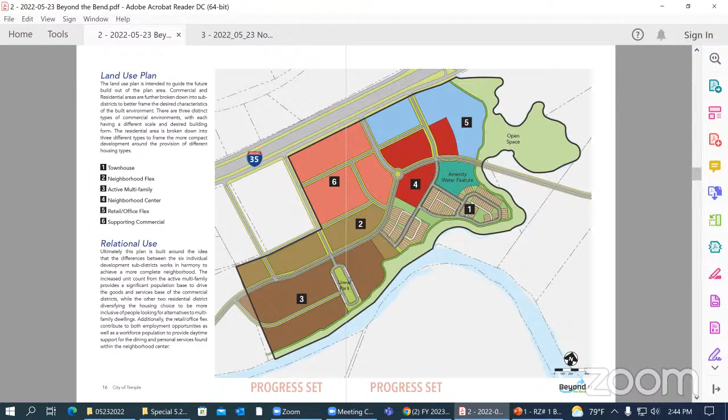And then lastly, open space, specifically a request from the developer. If you go back 2 slides, that chunk labeled open space in the north, it is kind of inaccessible to begin with anyways. So if you were to think about developing it, it's that much harder to get roads, that much harder to get utilities there. So identifying it right now as something that may be preserved as generic open space saves everybody a little bit in the long run as far as its ability to be maintained.

We've identified some typical development standards in here. We get that smaller lot, single family type, and then you get to that neighborhood flex, maybe it looks like a bigger lot.

So 100 feet in width in some instances by maybe a depth of 100, supported by an alley. But when you look at it, it almost is like a mansion-type house with multiple units in it. It's a different type of housing complex, more familiar from the 30s, 40s, 50s, and we're kind of trying to reinvigorate that.

Our active multifamily has real short setbacks, getting up to 4 stories. If they wanted to put in a garage behind it, you could do 5 stories, but that's what it's going to take to get there. Otherwise, you're not going to hit your target units per acre, and it wouldn't be worth it. We want to give them the option, though we've heard the market's probably not there in this area right now.

But if we can move the building a little bit closer, we can get more build-out on that area and get those higher units that can support some of that neighborhood commercial. Also, it's in a great location adjacent to the river and the open space and the parks.

As part of that, we know there's going to be some flexibility, so we want to make sure we're thinking about that within the initial planning process, identifying things like compatibility standards—where if you take something more residential in nature and put it next to something active with a lot more daily use, like a retail store, you can have a little bit of a buffer between the two, sometimes with fencing as screening, but definitely landscaping to help soften that edge.

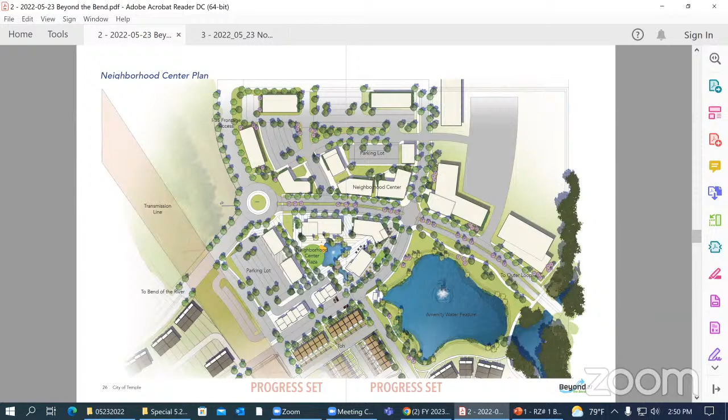And we do think there's some inward focused development to this as well. Some of that activity area for some sort of large green with some sort of water feature connected with that as well, as you can see, with all the development that surrounds it. We have townhomes and those flexible multifamily type units that are able to interface with this, and you can start seeing how they all interact and react and really harmonize around this one central point.

A lot of this starts with streets. We understand that in order to make this happen, you start to provide that guidance for how you get around the site, starting with our community collector.

The current major thoroughfare plan does not identify a community collector in this area, but if you're to add this much residential plus all the development going on in the future, or just even general access to the future site, you're going to need more than just the frontage road to convey people to and from the area. So we're really highlighting the need for that community collector to tie back to the south as well as to the north and eventually to the future outer loop, to get that second point of ingress into the site. And then we go down from there to our neighborhood collectors.

There's currently 2 that help feed into the southwestern side of the plan area where a lot of the residential is. Our linear Park Street is kind of an extension of that neighborhood collector. It's intended to really interact with the park, provide a lot of on-street parking, and help solve some of that multifamily guest parking, second or third car conundrum.

When you start to get into some of those 2-bedroom houses, we typically associate 2 cars for a 2-bedroom multifamily unit. But even with a 1-bedroom, sometimes it's still 2 cars. So you need to start to account for how we do this guest parking, second cars, and that on-street parking has to be accommodated somewhere. We've got to lay the groundwork for it with this kind of street plan.

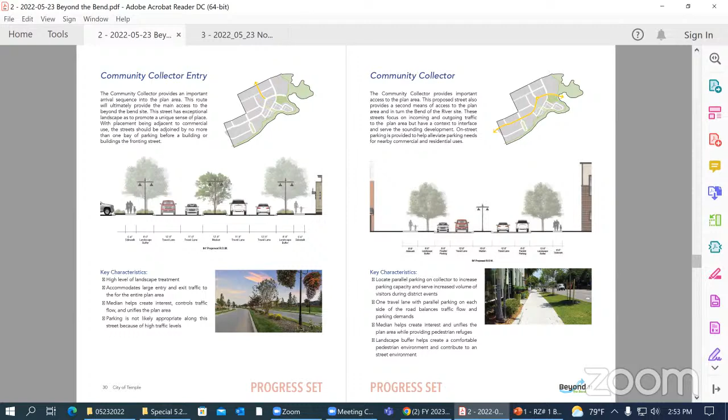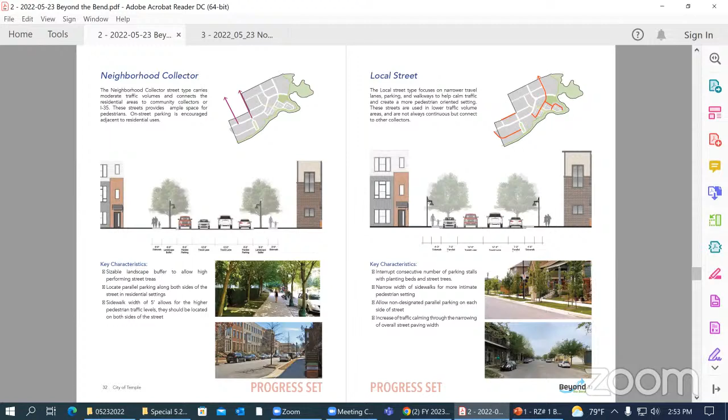We're proposing a side path on the south side of the road that helps tie in some multimodal opportunity for this key corridor. Again, we see that redundant but important approach of on-street parking, and then landscaping to buffer that edge with the development.

And we see that both on our neighborhood collector and our local streets. If we go to the last two, we have alleys, and we want to provide some direction there. We like the concept of, for alleys, the least amount of paving possible. Make sure you've got a good width, but you don't have to pave it all. So maybe 15 feet would be an appropriate width for the alley paving. But if it's a fire lane, sometimes you need to pave to that residential minimum standard of 20 feet we've seen in other places.

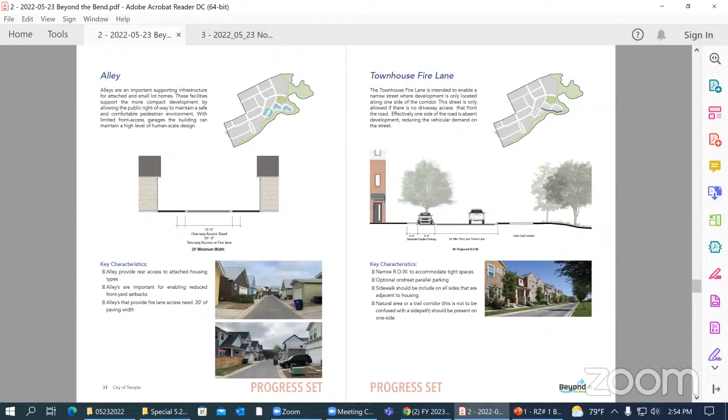And then we have the other one. There's some instances where there might be a need for what would effectively be a local road, but you're right adjacent to the riparian zone. So we said, maybe we can be a little more flexible, narrow the right of way, and really just think about the one side, because you already have a side path on the other side. So it's basically a half-street concept.

For our connector drive, we identified these as guidance to the commercial development in this area. It's basically a drive aisle with some expanded considerations for pedestrian and landscaping. We did this to encourage a walkable environment within that commercial office development. To do that, you need to break up these bigger blocks with access points. You don't need a full 50 or 54-foot right of way — you just need something that gives you a little landscape buffer, a sidewalk, and then a 24-foot drive aisle.

We don't need to beat a dead horse, but to really get that walkable space, you have to think about blocks. The bigger the block, the less walkable it is. But there's still that minimum return to consider — you still need to be practical. So we've provided some direction for how to think about blocks during the subdivision process.

And then, how do we think about not always meeting these block requirements with streets? Sometimes things like greenways — 34-foot strips of open space with a nice walk down the middle — serve that same role as a street from the pedestrian perspective. This allows you to maybe double what would be a regular block length, because you're removing the street and putting in this nice pedestrian connection instead.

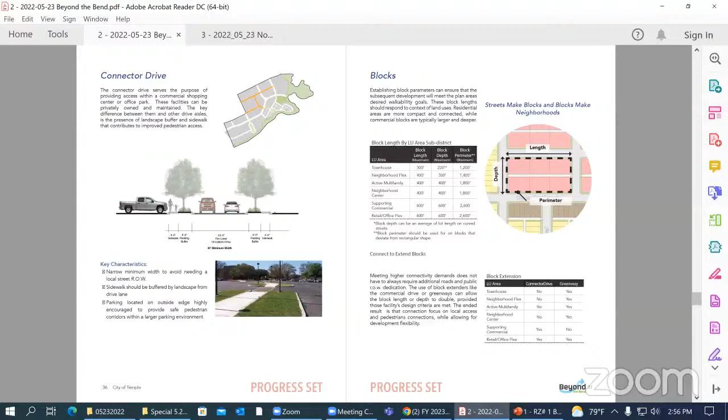So we think about trails and open space. A lot of times you think about side paths and such, but we really want to pull people from their developments into some of this open space as well. We're thinking about the overall shared use path along that main collector, but also how we pull people from those points into the open space and the overall trailway.

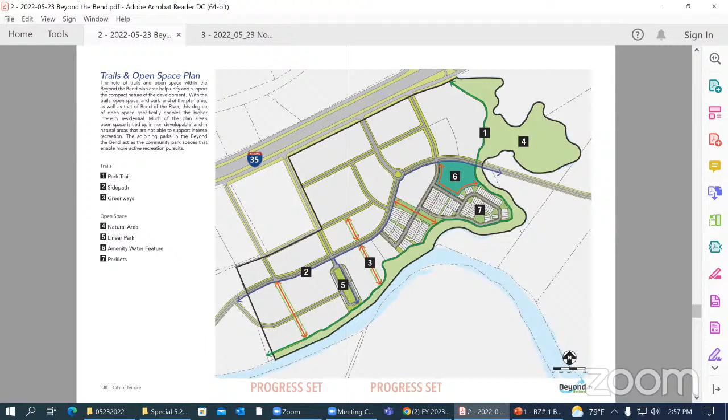These are the breakdown and delineation of the different open space and trail type elements. You can see here we have a couple different sections of those trails. The park trail has a 20-foot minimum right of way for that area — that may be the area that's maintained. You may have a mow strip on both sides of the trail, maybe even plant a tree on the development side to give some shade. We know there'll be a lot of shade along the river, but there's opportunity for shade on the other side as well.

We're looking at a 10-foot minimum, 12-foot max — we love a 12-foot wide trail for this, since we have people biking.

Maybe people are able to commute to work on this. The office is up in the northern part of the plan.

Our side path along the main collector, we're minimizing that width from what we normally would do as a 10-foot, because not too far away we have this large shared use park trail. We can minimize this to just an 8-foot wide paving area.

We do want that building interface to feel like it's coming and connecting with that as much as possible. Our typical sidewalks along streets and in greenways, and then our greenway itself, these are just wide strips basically breaking up that block, as Josh was mentioning, thinking about the walkability of all of this development is key. We can do greenways in two different ways: sidewalks on both sides of that greenway, or a sidewalk down the middle with connectors to that from the developments.

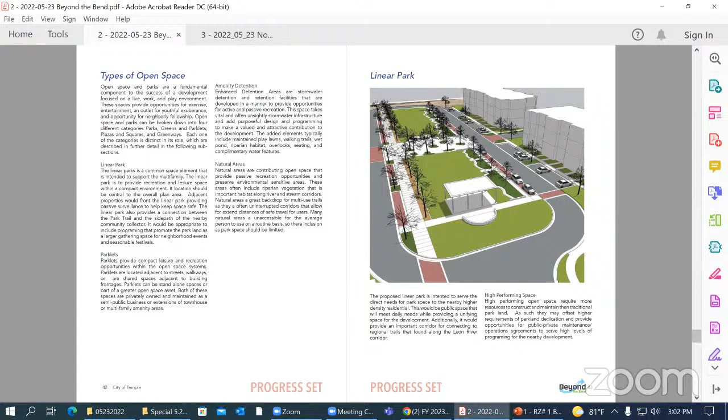That's the antithesis of the domain. The domain is missing park space and open space—I've heard numerous people say, oh, I'd love to live there, but... And you look at the little small parklets they have, they're overrun with people. Totally.

As part of this, we know that if we want this to be a complete neighborhood, we started to talk about the branding for it, the imagery. As part of that, we took in some direction from our developer and the site, and we pulled together this concept of beyond the bend. We've already talked about it that way, but it's really based off the site. Again, there's the bend of the river, what's next to it or what's beyond it. Well, that's where that comes from.

Our color theming really pulls in the need or the adjacency to the river, as well as, you know, we like this little hint of green because a lot of this was based off of the developer's desire to do some conservation practices out here.

And we see that branding kind of transforming into the wayfinding elements that help unify and get people around the site. We know that if you are going to have this level of intensity, you need to have that pedestrian scale wayfinding. People are going to visit, hopefully via bicycle as well as vehicles, so we want to make sure we're engaging both realms.

And then lastly, we just have some generic suggestions for signage. We know we want the signage to be a little bit more uniform across the development. Sometimes you get out there and the first five developments come in with great signage, all about the right scale, and then that last guy comes in and blows it out and screws up everything. So we think it's important to start thinking about signage as an element of the development. And this all ties back to that overall scale design we're really going for.

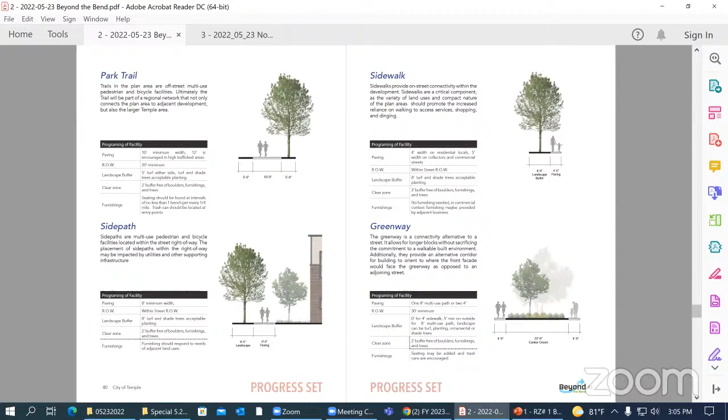Yes, just a second. Okay, one community collector going north. Out into the ether. What is that? Where does that go exactly? So it'll eventually tie into the outer loop.

And so as part of that, the goal is, hey, we don't always have to rely on the frontage road to get back into Temple. We're not saying that's built overnight, but it's a lot easier to get the right of way early on and plan for it than it is to wait. But if you think about all of this development, anything that happens into the river, you only have this collector coming out to 35 in two different spots. It's bisected from the rest of Temple.

Right, and so to get here, you'd have to come all the way around, through Belton and loop back around. I understand completely, it's very important to have that. So I still am having a hard time. So where...

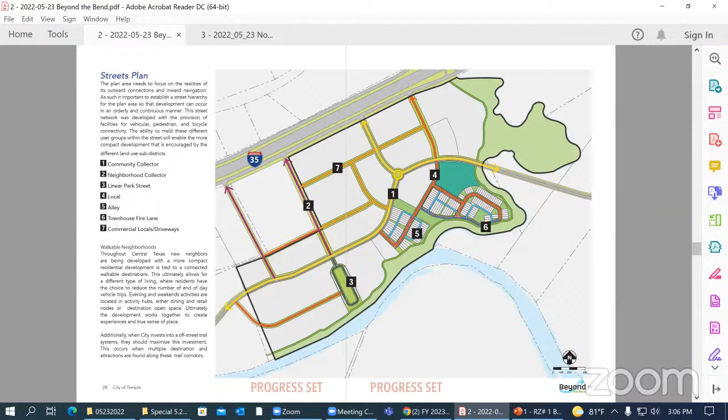Where along the outer loop does it join? It would just come in prior to that junction right there. Okay, I can sort of visualize it.

So, not very far away. No, I understand, neighborhoods right there. And right now it is undeveloped.

The future land use plan identifies that as more residential neighborhood. So again, tying back in allows better access between the future residential up here and the activity area. I really like the trails, the sidewalks, and also the parking.

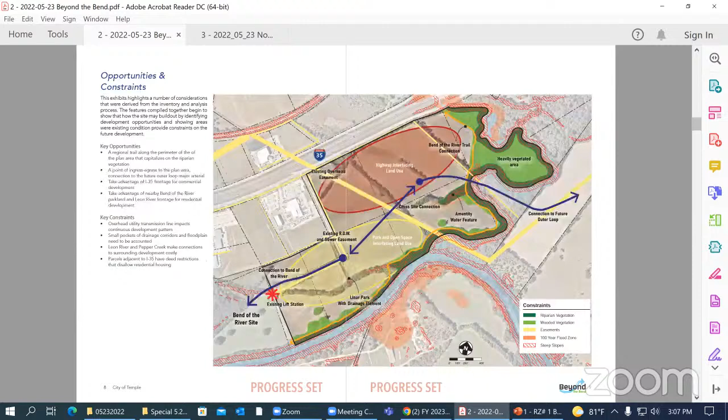Because you see a cluster of cars and you don't even see the houses, they need to be hidden somewhere, tucked away, so it can actually feel like a neighborhood. Especially at this smaller scale. With bigger housing and bigger lots, it's not as big of an issue, but when we're getting this compact, it definitely matters.

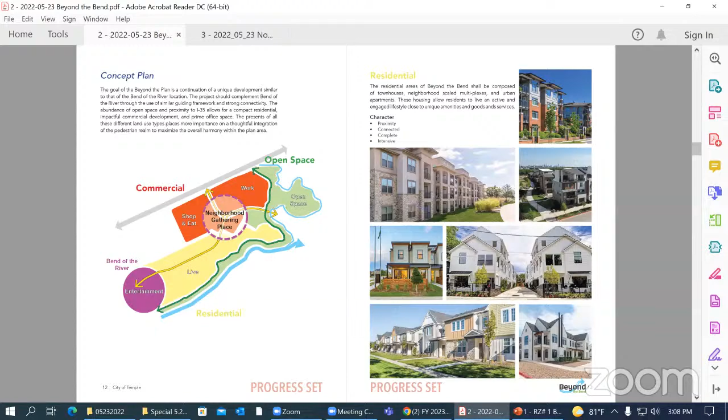How many total residents? 1,533 is our anticipated number. I thought I heard 1,500.

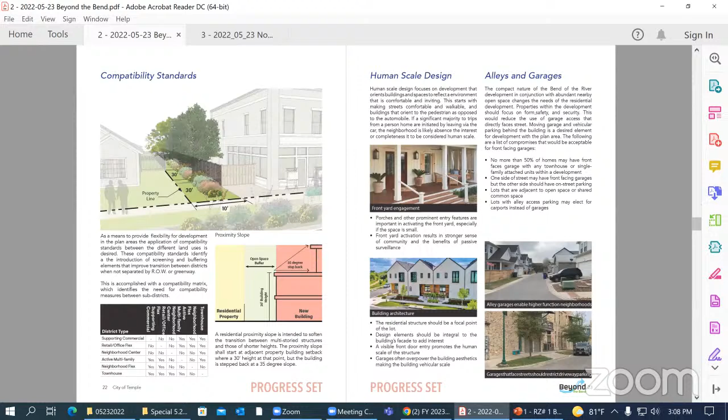We based the unit count on what the developer told us in conversations, what they were anticipating, along with some future thoughts of how he saw that area developing.

One thing I have to say is when we were told that someone was purchasing a large amount of land right next to the city's own property, we thought this was a great opportunity for us to work together on a master plan.

It really has been great working with this prospective developer. It's helped us along with the plan, and it's encouraging that this is also what they see happening here. Yes, we worked with them the entire way. They may not have seen this latest version, but I think they saw the 90% version.

Which is pretty much what we had last time, we just increased some of our sketches. That's what it was, the sketches.

Just like the sketches of the buildings, they saw the overall design concept in there. And of course we've been working heavily with Brian Chandler of Planning and Development Services, as well as Kevin Beavers with Parks and Recreation for the trail perspective.

This is an exciting opportunity for the trail. How many acres is that, roughly, for the whole development? I had it on that page... 50-something, it's 35 and 50 and 40, so just about 130, in the bend, beyond the bend of the river portion. Yes, ma'am.

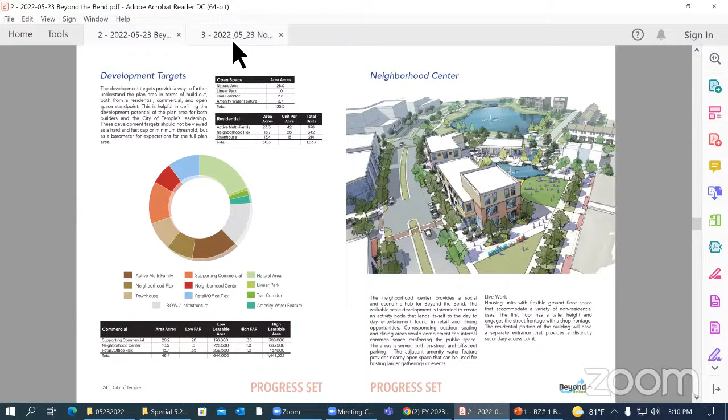Very good. Council, anything else? Very good, thank you gentlemen. Very interesting, gorgeous, thank you.

Show them the money. You'll see something happening first, very soon.

All right, moving on to item 3, to receive a presentation regarding the North Arts District Master Plan. Thank you, Mayor and Council.

Josh and Travis are going to hop right into this one. If you all recall, through funding through the reinvestment zone, it was identified that a North Arts District, surrounded by and adjacent to the Mayborn Convention Center and Cultural Activities Center, was something desirable in that area. So we had that done, and we also had the placemaking strategy in place, so we put this on hold to get that accomplished, and now that's done, we started up again with the North Arts District.

There were some changes and modifications from what we learned from the placemaking strategy, and also a bit of a reduction in the overall property for the actual North Arts District. So we'll be talking about that.

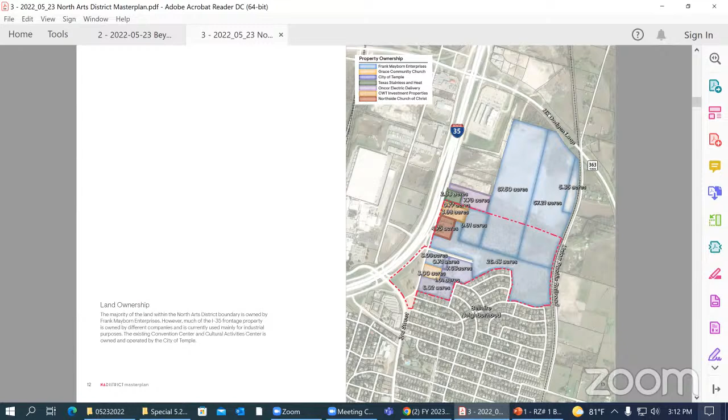So property owners, we do have quite a bit of the property owned by Sue Mayborn and Mayborn Enterprises. We do have a little bit owned by the city, and a little bit owned by a church, but nothing too bad.

Current zoning, it is zoned commercial, general retail along 35, with some 2F in the backside, marrying up with the neighborhood. We recently, about a year ago, finished up the Bellaire neighborhood.

One of the things from that neighborhood plan is they were concerned about the type of development that was going to come north of the neighborhood and how it would impact their homes and their experiences. We looked at that neighborhood and realized it's in good shape now, but it could go either way in the next couple of years. So making sure we marry up what's around it to support that neighborhood is a key characteristic. Otherwise, we could probably see some disinvestment in that part of town.

And the last thing to take note of is light industrial to the north.

Photo inventory of the site. Again, we have the Mayborn Convention Center and the CAC. We know what those buildings look like. They're set pretty far back from 35. You can't even barely see the building, so there's not a sense of arrival, no sense of place there. They're pretty monotone in their design aesthetic.

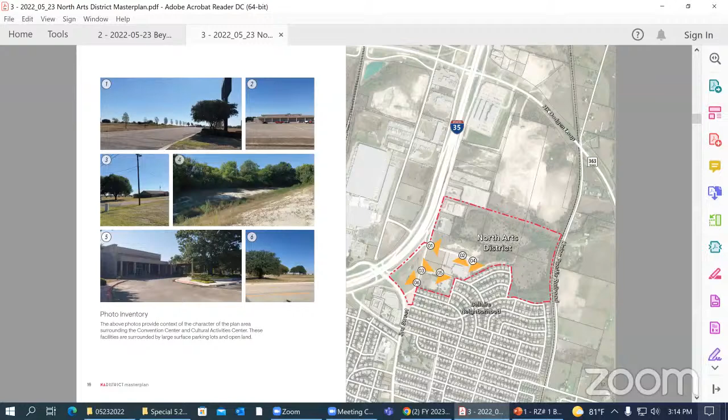We do have some drainage elements. You can see number 4, we need to take note of. It's just a pretty expansive site, not a lot of vegetation and other elements geographically on here.

Again, one of the utility issues right now, and part of the reason there isn't development out there, is there are no utilities out there. As part of the next phase, there's going to be a lot of utilities to be installed, as well as maintained by the city moving forward. So making sure we get the type of development we want in this area that supports that long-term maintenance of those utilities is key.

There's a big chunk there that is an easement that is, for all intents and purposes, functioning as a drainage easement for both some of the Bellaire neighborhood as well as the CAC. So we know that's probably something that has to stay.

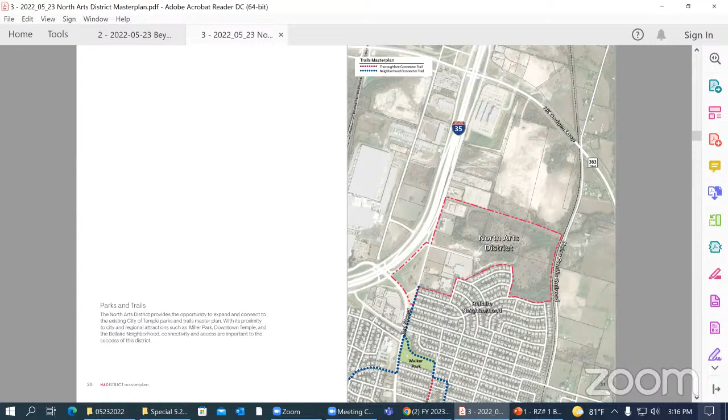We've done two neighborhood plans, Bellaire and Jackson Park, and both of those leaned into this concept of a trail that would unify Bellaire and the Jackson Park neighborhood, also potentially the cemetery, as a nice off-street, safe route. The trail also goes right next to the middle school and the elementary school. So we want to make sure that trail exists and serves a pretty big function. We want to tie into any future plan.

Temple obviously sits in an amazing location in Texas. You have a lot of large cities that triangulate the Temple area. So when we're thinking about visitors, events, convention centers and spaces, we're thinking about where we're pulling from. Basically, we can't screw this up. There's plenty of people, and there will continue to be plenty of people and activities and things happening.

We think if we're going to be developing in and around the convention center, why not bolster this up and start to take advantage of all the people. So we did a few case studies looking at other types of convention and conference spaces that had some of that live-work aspect to them, open space, things like that.

We looked at the Woodlands, we looked at the Pearl District down in San Antonio, thinking about how it interfaces with open space, the activity happening outside, the walkability of it, the vibrancy of it. Again, Waco Convention Center is not too far to the north. Its location to the river definitely helps it; it's becoming a walkable location.

It is not right now, but it's becoming one. These aerials show the difference where the other examples were more integrated into the overall site. The Waco Convention Center is more or less surrounded by parking and maybe a couple of apartment-hotel buildings. Another thing we really gleaned from these case studies was the amount of art integration throughout the open spaces and in and around the convention space.

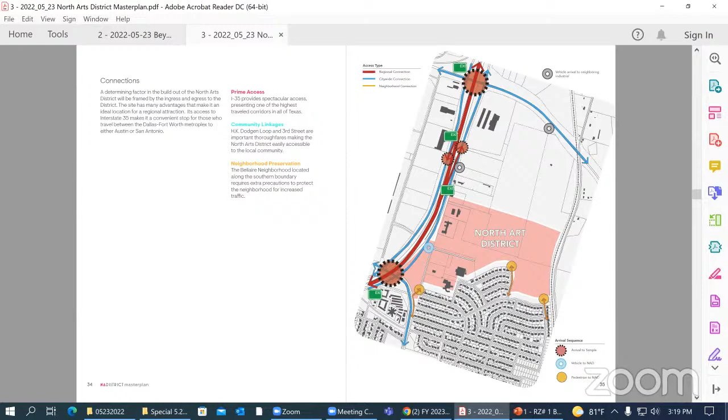Another thing to take note of is the potential pedestrian connections along 3rd Street from Bellaire, in two different locations as well.

So when we sat down and looked at this space, we said, hey, how do we break it up? How do we start thinking about a complete experience? We're like, hey, it's the North Arts District — let's keep it in arts terms. Let's make the place where people live the Arts Village. Where people want to coalesce for day-to-day activity, we'll call that the Arts Hub.

And then clearly we have the convention space, but how do we think of it as more than just a convention space? We said, hey, you know what — we've heard this might be a good place for a long-term presence for a theater facility. So we said, let's put this as the Theater and Convention area. Those are the three key sub-districts of this plan area.

Lastly, we knew that this site had great access from the freeway. I-35 is important; we knew we had to draw people in. We understand that, and that it's a visible location. So let's lean into the concept of corridor commercial. How do we do that? Well, we just let it happen — we'll guide it a little bit, and we'll come to that in a bit.

Our primary entrances are clearly going to be along the frontage road. We've identified two there, plus an additional one on 3rd Street. A lot of that gets you toward the Arts Hub and Theater-Convention space first and foremost, and then as you transition into that, you have some other access back into the Arts Village.

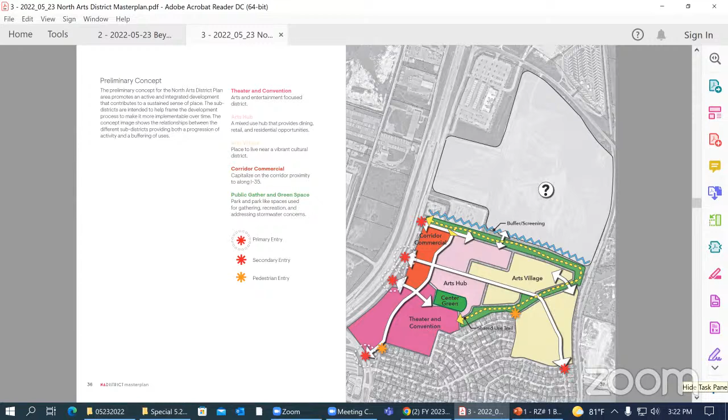So here you can see all of our different uses. These are about to be reflected in some imagery and characteristics for each of those uses. So we'll quickly walk through each one of these.

Theater and convention, you can see some of that imagery we have for that. Think of symphony, maybe they come up here. You're really starting to activate and centralize the arts of Temple into this northern location.

We're thinking educational type spaces. It's that gathering element as well, bringing people out here for large events. The arts hub, it's lively, it's fun, it's happening. It's kind of the center area.

People are coming from living here. People are coming from other cities. People are coming from the regional area, from Temple. Lots of different types of activities happening. Again, that's that center point of the development.

We do want to start to transition the space between something that's a little more flexible, allowing a live-work unit to be part of the arts hub, maybe studio space, maybe a gallery, a candy shop, something along those lines where the owner's living above. Any of those kind of things, we really like that.

Maybe it's something like, hey, that's a lawyer's office on the first floor and he lives above as well. We like to see that in this area.

Also, we're proposing a concept of a creative incubator. We're identifying 2 basic blocks for that, where you have space specifically designated for anything from pottery, maybe some craft cabinetry or something along those lines. But art studios, maybe some IT, just anything in that creative realm that's quasi creative class, may sometimes push the boundaries of light industrial. But if you put them all together and set an expectation for that, people will be a little more receptive.

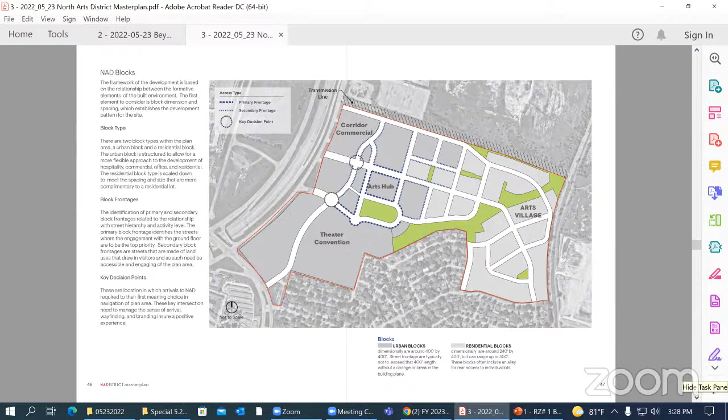So our activity is really focused around that arts hub. When we look at it from a use breakdown perspective, we've got our corridor commercial against the corridor, our theater in the south, our arts hub, and our arts village, all transitioning along a transect.

In this space, we're talking about 176 single family units and 390 multifamily units in the arts hub—about 600 or so housing units supporting that area. We'd like that number a bit higher to support the commercial, but we have established neighborhoods to the south that we think can help draw in and support our projected commercial.

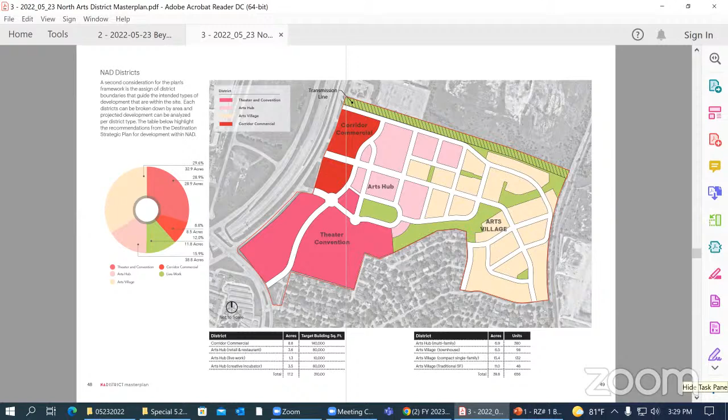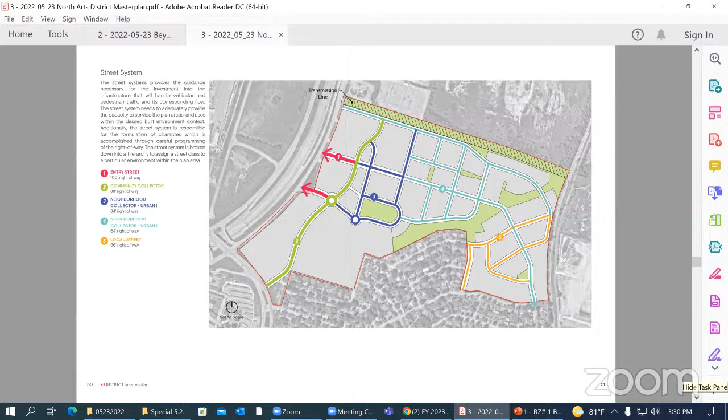Community collectors are urban type streets—this is where all the activity and streetscape happens, with people sitting, walking, and parallel parking, on number 3. Number 4 gets a little more traditional in terms of street interface; we still have parallel parking, but homes may be pushed back further, and traffic is a bit slower. Then our locals, closer to Bellaire, tie into existing neighborhoods.

These streets really correspond with their surrounding environment. Our entry street is meant to get cars in and out of the site—four lanes, two in each direction, with a good landscape buffer between that and the sidewalk.

For our community collector, we're showing a cycle track, another name for a trail, which is a designated facility for bicycles. We wanted to split up the two different user groups along that community collector so there's clearly a pedestrian realm and a cyclist realm. Note its connection to 3rd Street and its overall connection to downtown—we think that's a very prime location for that cycle track.

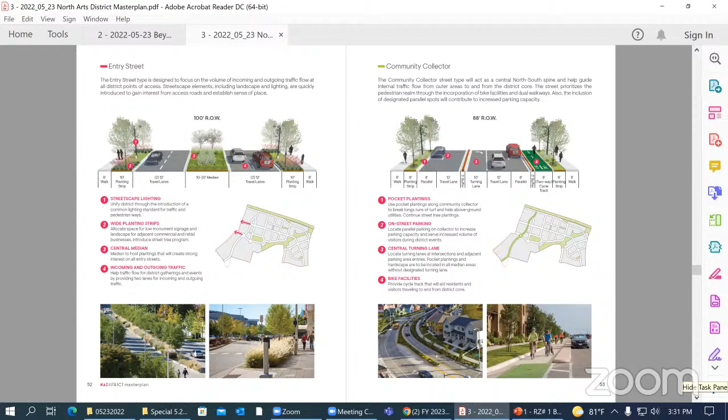Our neighborhood collector, Urban One, is basically the street we're using to serve the arts hub, with a mix of angled and parallel parking. The reason is we're trying to maximize the building footprint, so we need street parking to account for visitors to the area.

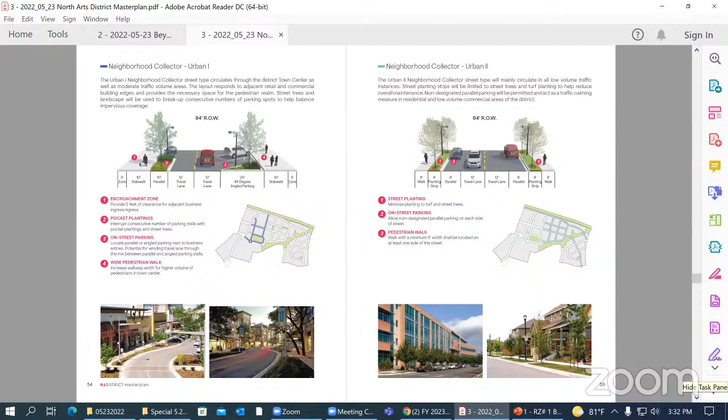Our neighborhood collector two, as Travis said, is a little more of a traditional street, but because we're talking about big houses on relatively smaller lots, we want to make sure we're using that planting strip and sidewalk to provide some buffer between the street environment and the house. So just a little bit bigger right of way.

Our local street, again, a little bit more traditional. We think there's probably going to be a fair amount of on-street parking in this area, and as such, we want to make sure we have the room to accommodate them.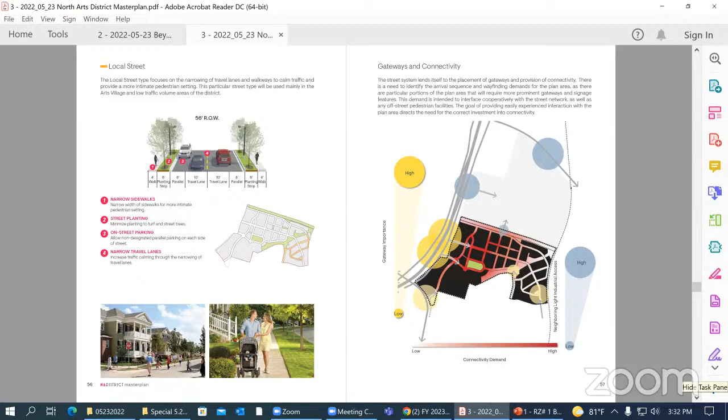Then looking at those parks scattered throughout the development - we are looking at a large house on a small lot, so we're not thinking a lot about their own yard. So how do we start dispersing some of that parkland throughout? And the accessibility of all those park spaces is really punctuated with a clear route.

You can see the side path and the multi-use trail. That loop we're drawing is about 1.3 miles. We like that concept because if people were getting on the loop and walking around their neighborhood every day, and they got that 1 mile, 1.25 miles in, they're getting to that 20 to 25-minute walk range, which is key to a healthy lifestyle.

And the majority of it is off street, so it's comfortable. We don't have a ton of imagery right now - we're still kind of in progress on a little bit of this plan - but we think this could be that cool arts trail through the neighborhood, maybe a personal showcase of some of the residents, with stands where they can put their work out there.

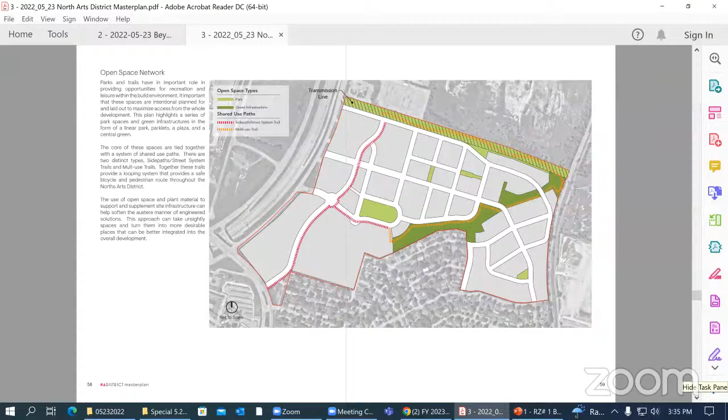We should have a breakdown of what those open spaces are in terms of their activity, their programming, experience, whether that's individual or group, and then the intensity of the landscape. Is it more plaza-like? Is it more open space, or is it more natural? So we have linear parks, parklet—so those are smaller spaces—plaza, which we'll show you here in a little bit, that center green, side path, and then multi-use trail.

Again, we want to really call upon the idea of utilizing that stormwater throughout that drainage easement, thinking about the green infrastructure and making that an amenity. I think that's important. And then again, screening both from different land uses and from a neighboring edge.

So this is our overall plan. You can see our main community collector running parallel to 35. We have that commercial corridor to the northwest. You can see it's almost, if you think in terms of a transect, which would be your intense areas to less intense areas—we kind of have our intensity happening on this western side, and it slowly eases into what a Bel Air type of neighborhood would be with its single family lots.

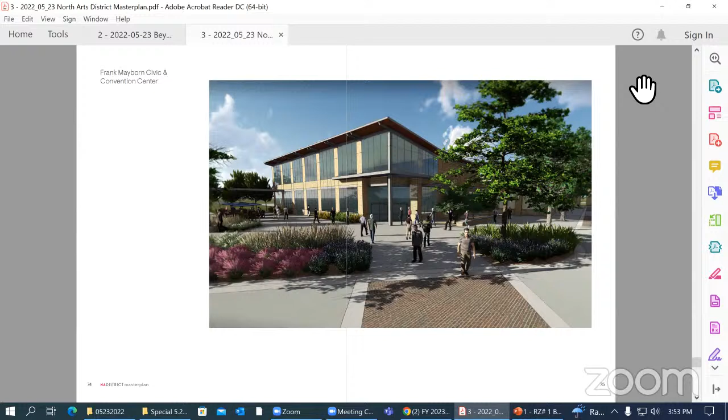So that's the front. That space would look out onto the open green, right here. You said that would capture from I-35 - that's the north side. It's more that you would be able to see it, it's just a visual capture.

Thinking about how this existing convention center interacts with other development in and around it, we're thinking about that pedestrian scale design and your arrival into the center. Right now it's just blank parking - you may not even know where to enter.

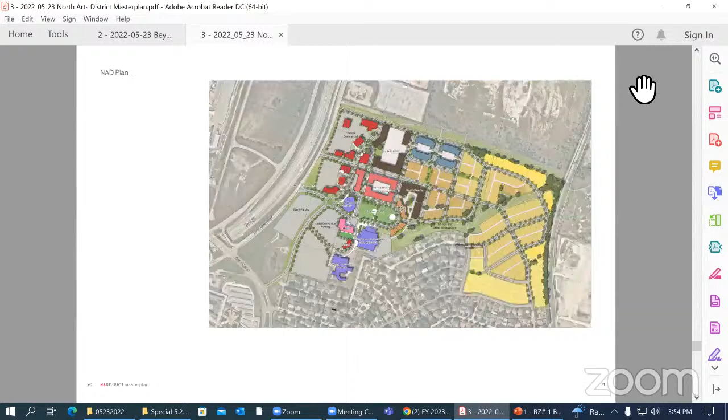If we go back to one of the plans we're still working on - the last one was good, the green one. This space right here is kind of like a plaza piazza type space that can be used for drop off or it can be completely closed down. Maybe you put the Christmas tree in the middle and put some booths on the outside - it kind of has that bazaar or festival space.

Again, it is the access between the proposed performing arts, the convention center, and a hotel space all in the center. This could be a nice pedestrian plaza, or when there's no activity going on, you allow it for continued access. That's one of the nice things about the grid system and street layout we have - there's other ways to get around the site, so when you close that down, you're not really impacting too much.

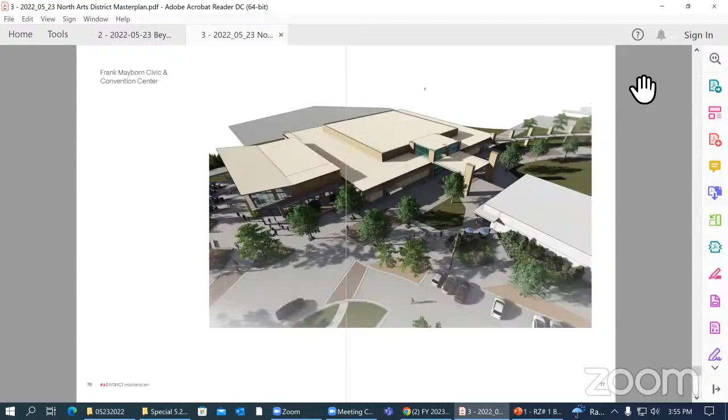Looking at some of the existing work we had done in terms of the arrival from 35, the signage for the convention and North Arts District, thinking about that branding and monumentation - still calling attention to the Mayborn convention center, but also North Arts District.

We got a little bit cut off on the left side - that's my fault, it's all right. Maybe you can see that hotel in the distance, really calling attention to that visually - it's good.

Again, just that arrival sequence - we're utilizing the same entry point that is currently there right now, but improved off of 3rd Street. 3rd Street is very important, and that will have signage as well.

These pillars are pulled from the architectural elements of the existing convention center, just trying to tie that in, that architectural look. We think that could marry up with that 3rd Street entry as well.

Part of the next steps is showing the different monumentation, where it's located, and having a map exhibit for that, showing the art characteristics we'd like to see in these spaces, and some more renderings of the overall plan. There's a lot to this plan and a lot of story to be fleshed out with more visual aid type things, and that'll be our continued progress on this plan.

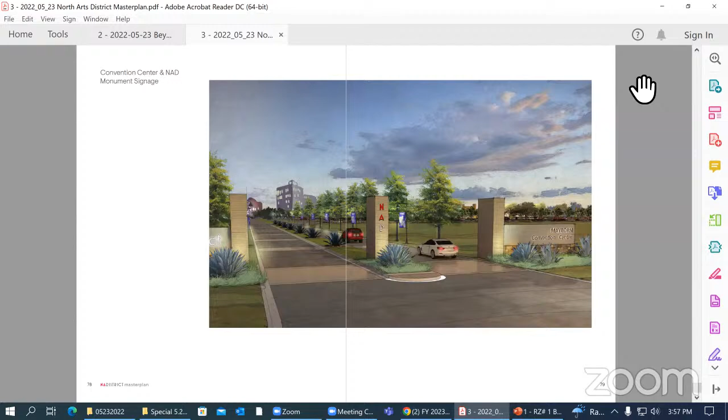Again, also looking at maybe some better buffering on the northern side. Love it, but there's no solid location for that parking garage. You've got no parking for that. It definitely needs a parking garage. You're not going to be able to add additional parking. That parking lot's full now. You just took that whole front parking lot away.

We are hoping to expand out into this frontage area as well with large event type parking, which you can add as overflow. So a parking diagram will definitely be in this plan, since it's pretty big of a street to cross. In reality, you should. We're hoping, but we've still got a parking problem. We have a parking problem.

We'll figure it out, we'll put it on there. We'll show the diagrams where people are going. Hopefully this is more than we need, so this would be all parking here, probably somewhere in the neighborhood of 15 acres of parking, and then overflow parking over here. That's the one where we've got to make sure we can for sure park maybe one event, but if we're having events in multiple areas, we need to make sure we've got everybody covered.

And then I think about once you're parking all over that, the accessibility on those roads as well. Yeah, we do have good sidewalks and things like that, and we have multiple access points. You want to get a good front, because you're saying how great it's going to look, but where you're putting your parking garage is blocking most everything, so you're going to want to integrate that into the plan.

We do have this page right here, where we're thinking about the facade of some of those parking structures. How can we enhance those to make them feel appropriate to that human scale design, tying into the rest of the architectural aesthetic that we're trying to push through.

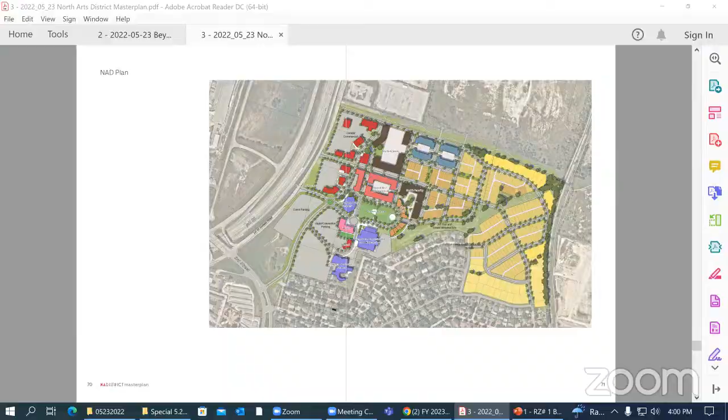At this time we'll receive a briefing from the city attorney regarding contracts originally executed between Panda Temple Power LLC and Panda Temple Power 2 LLC. Pursuant to Government Code Section 551.071, the city council will meet in executive session to discuss and receive advice regarding a matter of attorney-client privilege. No final action will be taken.

Want me to read 5 and 6 in also, just get it all? Number 5 is to receive a briefing from the city attorney regarding the provision of utility service outside the city limits. Pursuant to Texas Government Code 551.071, the council will meet in executive session to discuss and receive advice regarding a matter of attorney-client privilege. No final action will be taken.

Number 6 is to receive and discuss a briefing regarding certain economic development prospects and potential real property acquisitions or sales pursuant to Texas Government Code 551.072 and 551.087. Council will meet in closed session to discuss or deliberate the purchase, exchange, lease, or value of real property, if deliberation in an open meeting would have a detrimental effect on the position of the governmental body in negotiations with a third person; to discuss or deliberate commercial or financial information received from a business prospect that the governmental body seeks to have locate, stay, or expand in or near the city of Temple, with which the governmental body is conducting economic development negotiations, or to deliberate the offer of a financial or other incentive to such a business prospect. No final action will be taken.